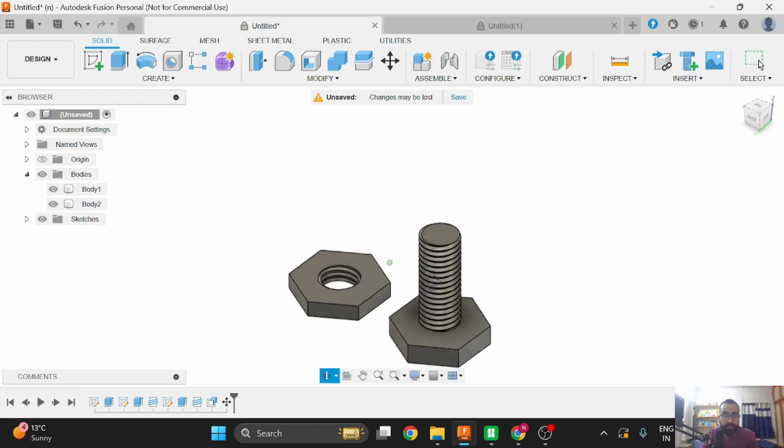Let's get started. We'll create a small sketch on the Z-axis and create a polygon which will give us the design of the screw's head. Let's keep it 12 mm and extrude it up to 5 mm. So the base of the screw is ready.

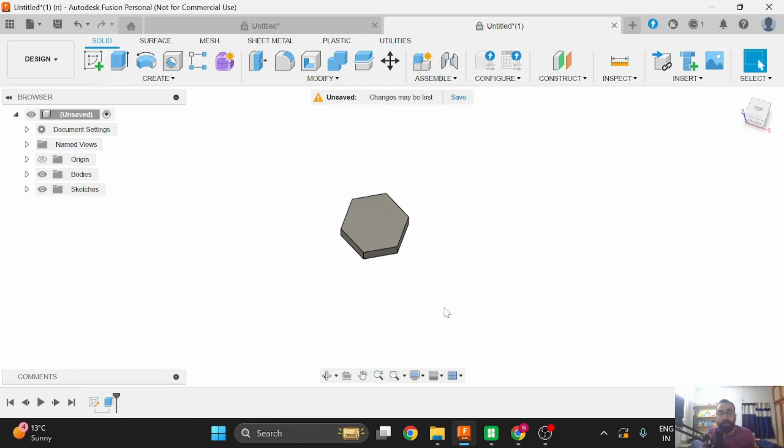We can select the surface above and create a sketch. We have the center here, so we can click on this circle and create a circle of 10 mm. We are going to model threads of 10 mm for this tutorial. Select the circle and extrude again up to say 25 mm, that is roughly 1 inch.

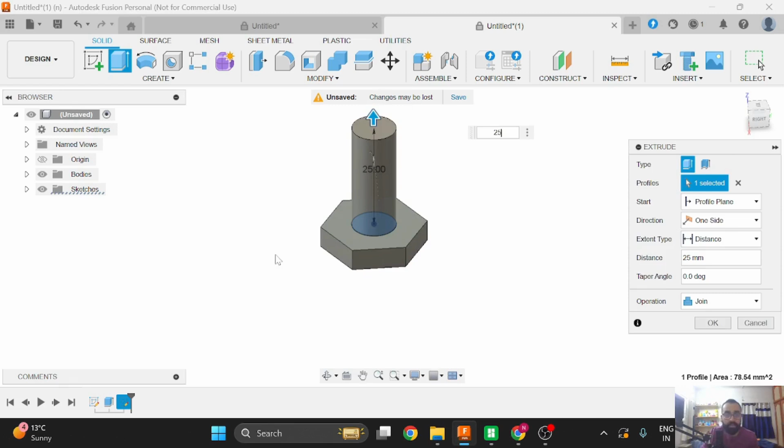So the base of the screw is ready, so we can select the part where we want to model the threads. We just select the body, go to Create and select the Thread option. Now there are two types of threads that you can make.

As you can see, there's one option here which says 'Modeled.' If this is selected, it creates an actual thread - it models the actual threads in the body. If it is not selected, it gives you the graphical representation. Since we want to print actual threads, we'll keep this option selected.

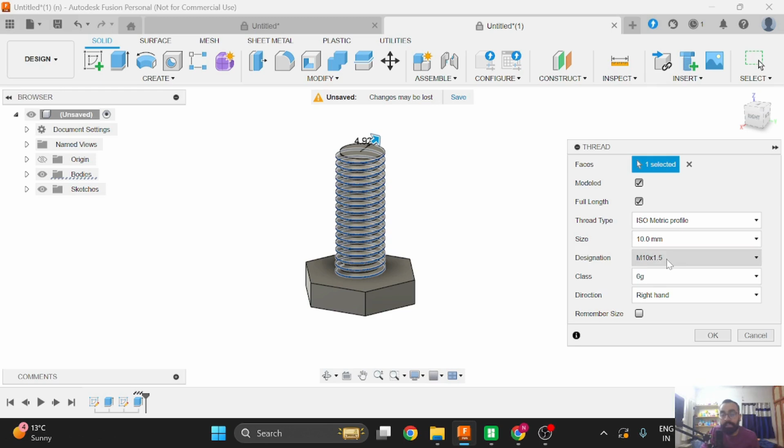So we'll just select the highest pitch available and click OK. As you can see, we have modeled the 10 mm threads on this screw.

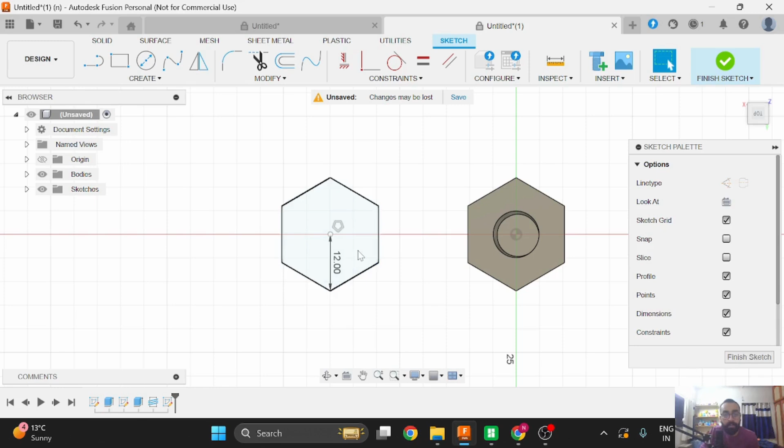Now let's quickly go ahead and create a nut for this screw. We'll create a same size nut - create a 12 mm polygon, select it, and extrude it for 5 mm. So the base of the nut is ready.

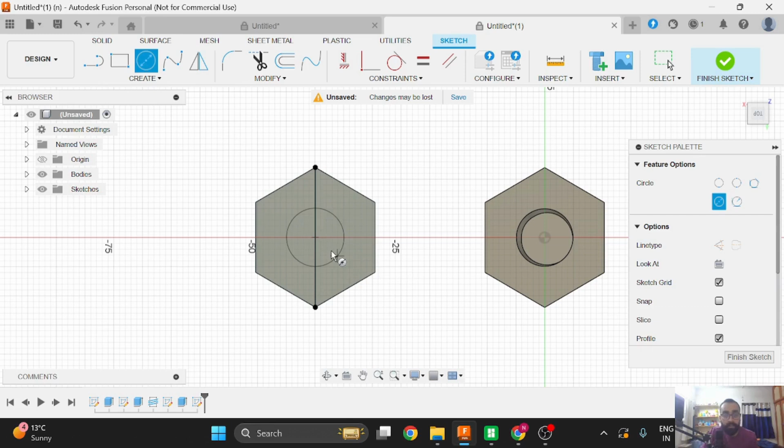To create a sketch on the top surface, we create a line in between - it's not marking the center, so we just create a circle of 10 mm again. We can delete this reference line. You can click on this and extrude it to create a hole of 10 mm for this nut. So the base of the nut is ready.

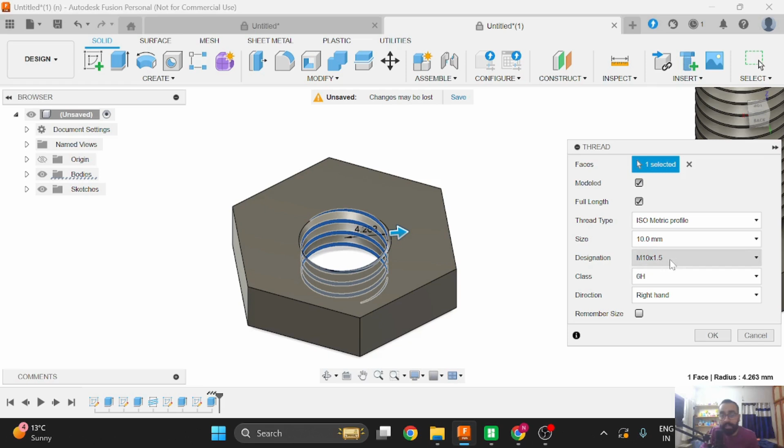Now we'll select the ID of this nut, which is the inner diameter, and we'll go ahead and create threads here. With the same process, we'll click on Modeled, 10 mm, 1.5 mm. There will be no difference here.

Now, this is the tricky part. What happens is the size of this thread and the size of that thread is exactly the same, so when you print it and try to fit it in, it will be extremely tight because there's no tolerance. So what we do is, for either body, we offset the surface of the threads by say 0.2 or 0.25 mm so that it gives enough tolerance to fit in right. Let's go ahead and give it that tolerance.

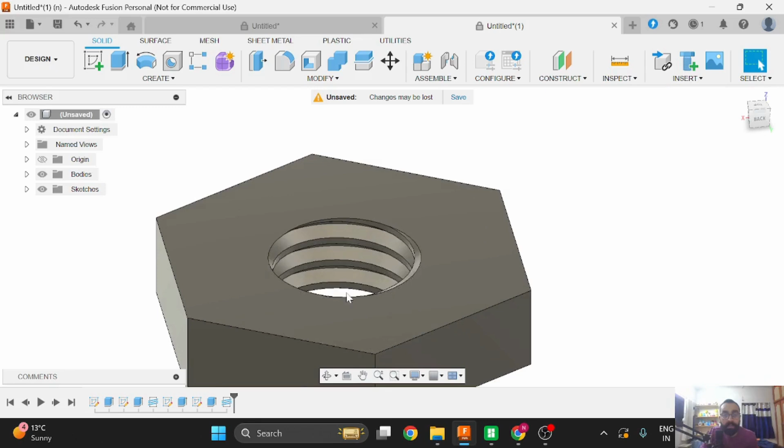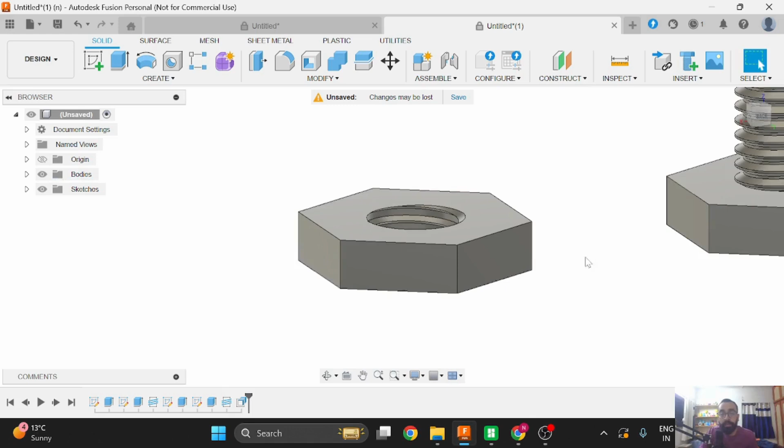You select the upper surface of the threads, then select the lower surface of the thread. As you can see, the upper surface and the lower surface are selected here. Go ahead and press Q on your keyboard - this will give you the Offset Face feature. Just put in -0.25, and it will offset the faces by 0.25 mm, which will give enough tolerance for the nut to fit on the screw.

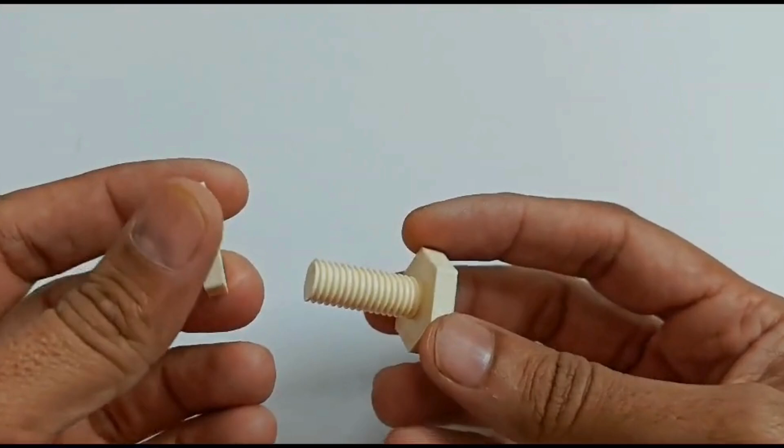So let's go ahead and print it and see how it works out. As you can see, we have successfully 3D printed the screw and the nut we just designed. Let's go ahead and try to see if they fit in properly. Yes, they do - it's working really fine, and the 0.25 tolerance we gave for these threads seems to be quite perfect.